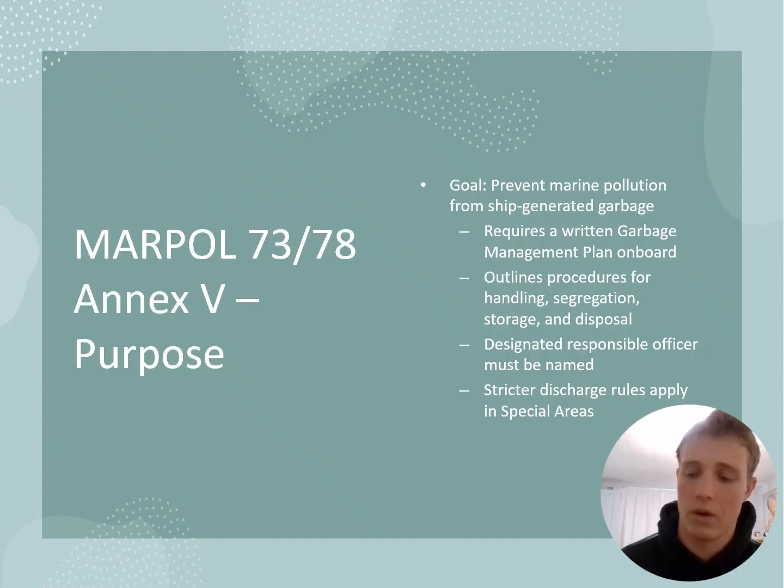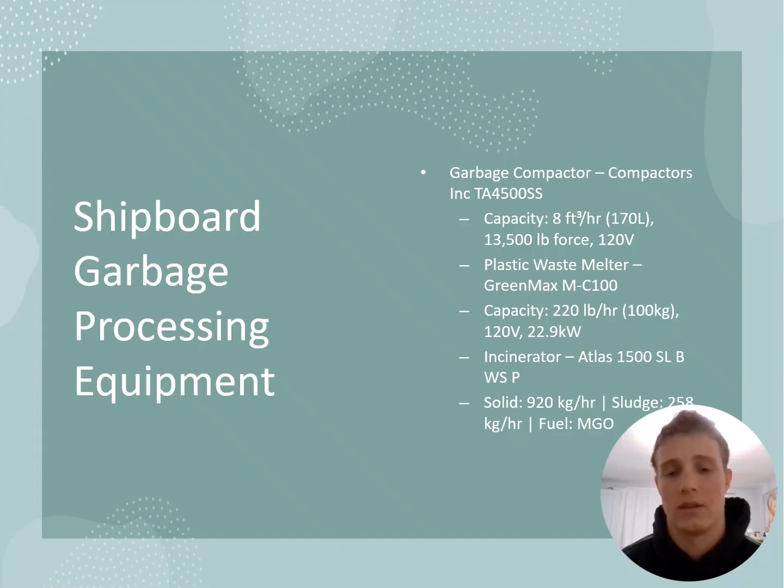So some of the processing equipment includes the compactor made by Compactors Inc. The capacity is 8 cubic feet per hour with a 13,500 pound force. Then we have a plastic waste melter for all the plastic garbage, which has a capacity of 220 pounds per hour. And then lastly, the incinerator, which is an Atlas 1500, and that's going to have a solid capacity of 920 kilograms per hour, and then sludge capacity of 258 kilograms per hour.

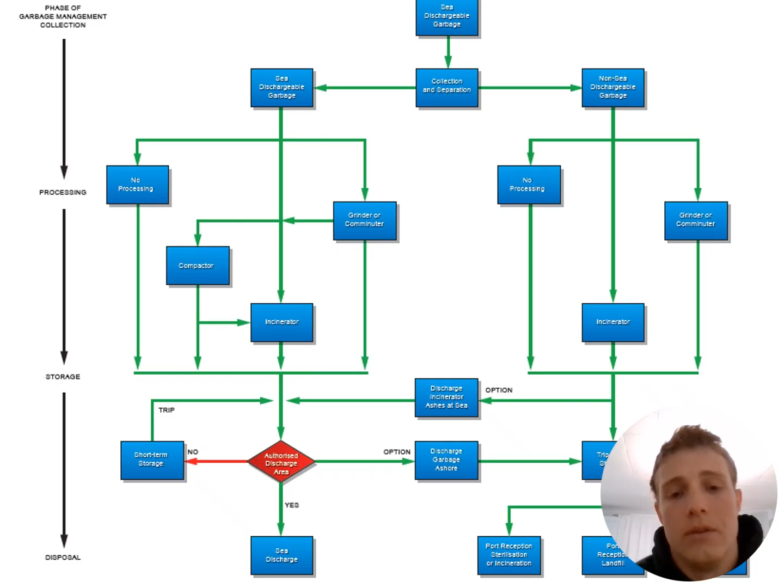And so this is the garbage management plan. So basically, it's going to go to sorting, and it's either going to go to dischargeable garbage or non-dischargeable garbage. And so the dischargeable garbage can either go to not be processed or to the compactor, incinerator, or grinder, and this just depends on what kind of food that you're processing or what garbage you're processing.

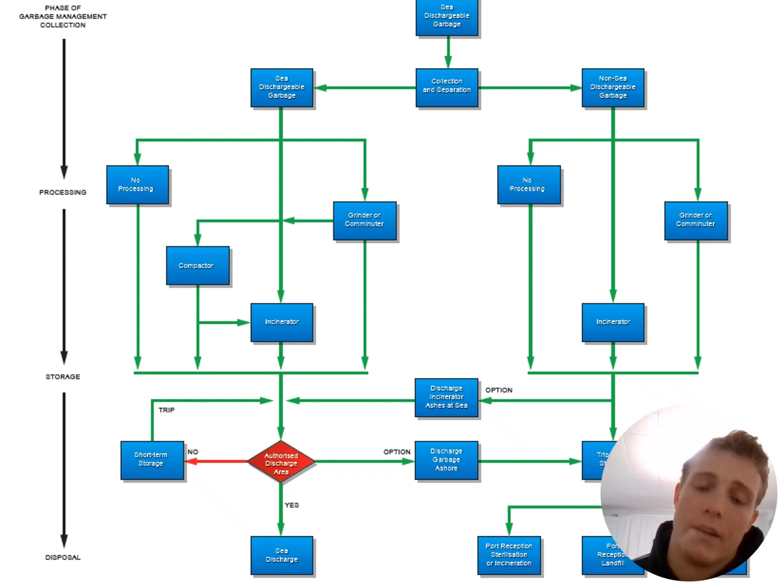So, and then after that, it can go to discharge area and either be put overboard or sent off to storage for port disposal. And then the non-dischargeable garbage can either go to no processing, the incinerator, or a grinder. And then after that, the incinerator ashes can either be dumped overboard or brought to storage for port disposal.

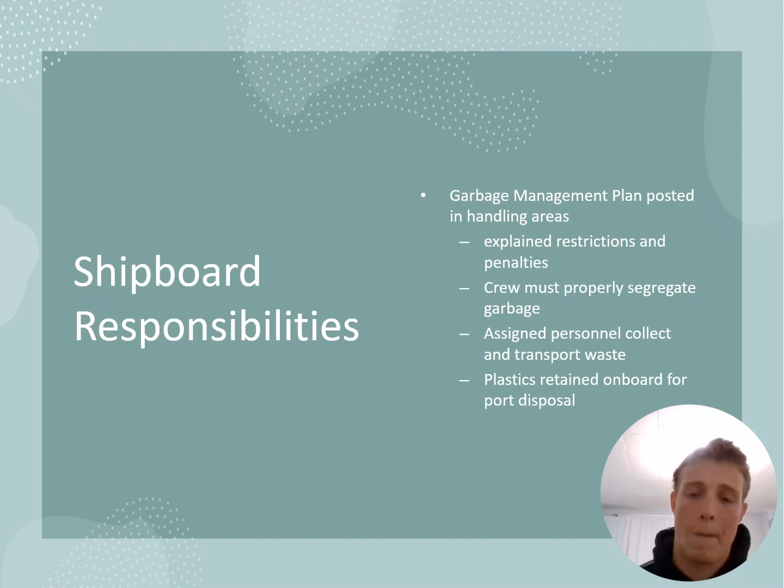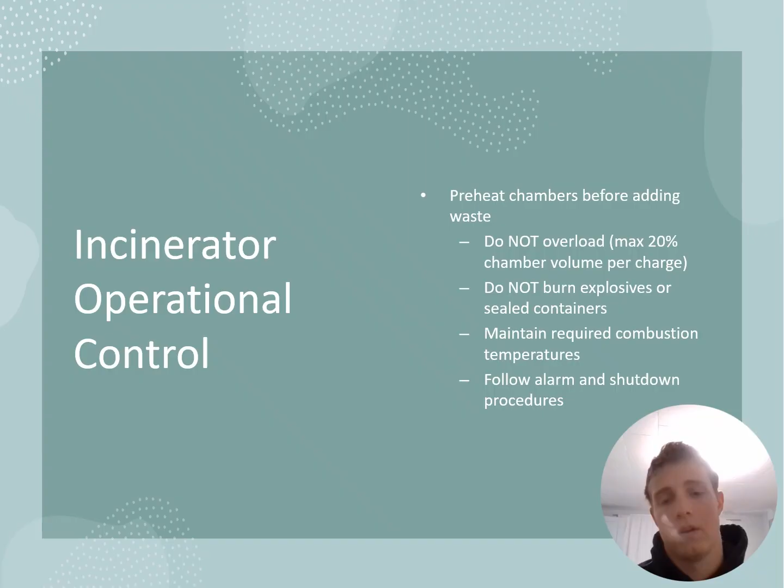So this is the incinerator control. It's kind of just an overview of the parameters of the incinerator. So you need to preheat the chambers before adding any waste. Don't overload it. So the max chamber volume is 20% that you can add at a time. Do not burn explosives or sealed containers. Must maintain required combustion temperatures so that all waste is burned. And then need to follow all shutdown procedures for the incinerator.

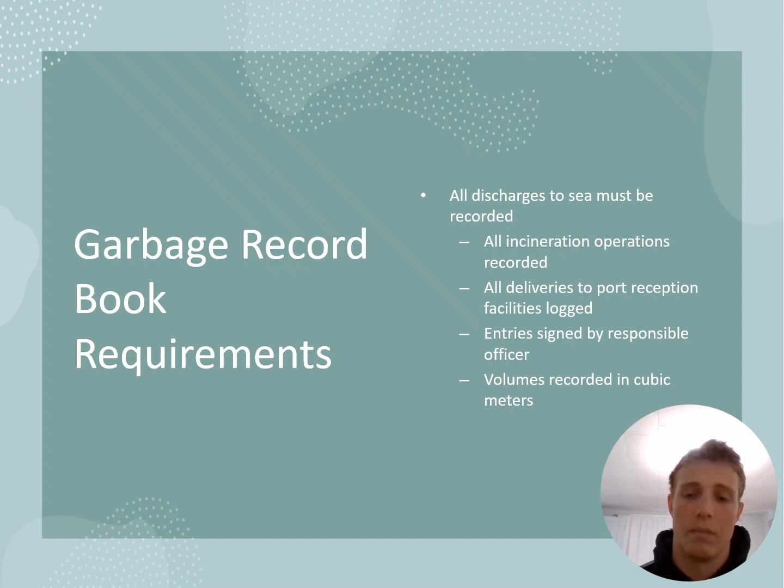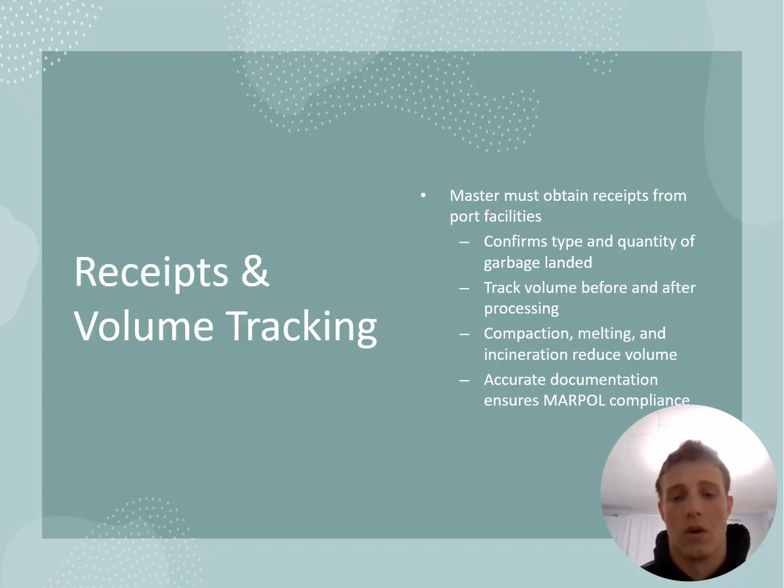So lastly, receipts and tracking, which is done by the master captain. This confirms the type and quantity of garbage landed, tracks volumes before and after processing, and this shows MARPOL that there's an accurate documentation of garbage.

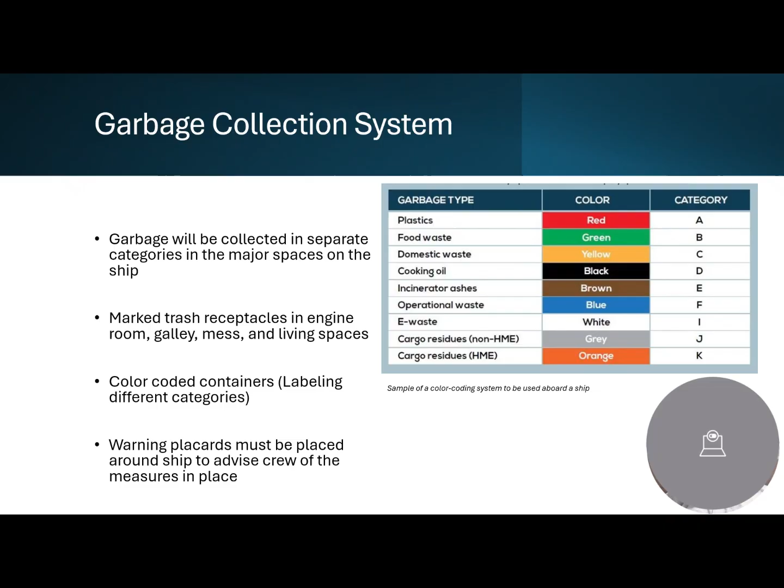It is a requirement under MARPOL 73/78 Annex V to have a garbage management plan on board the vessel. It is crucial that all crew on board follow this plan. The plan will outline procedures for handling, segregation, storage, and subsequent disposal of ship's garbage, as well as a plan being placed in all locations of major garbage handling. The plan will also name the person on board responsible for the management of the plan.

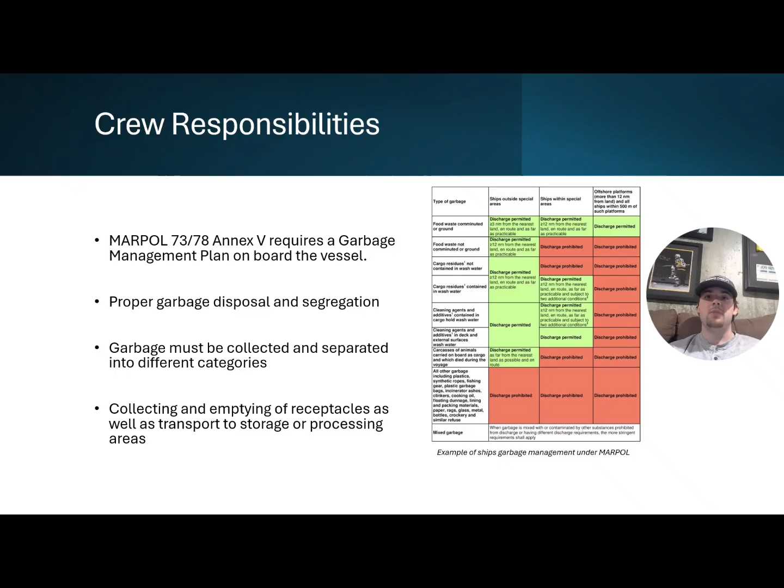The main garbage categories include, but are not limited to, plastics, food waste, oily and contaminated rags, and other garbage such as paper, glass, metal, dunnage, and incinerator ash. Each of these categories have different disposal requirements.

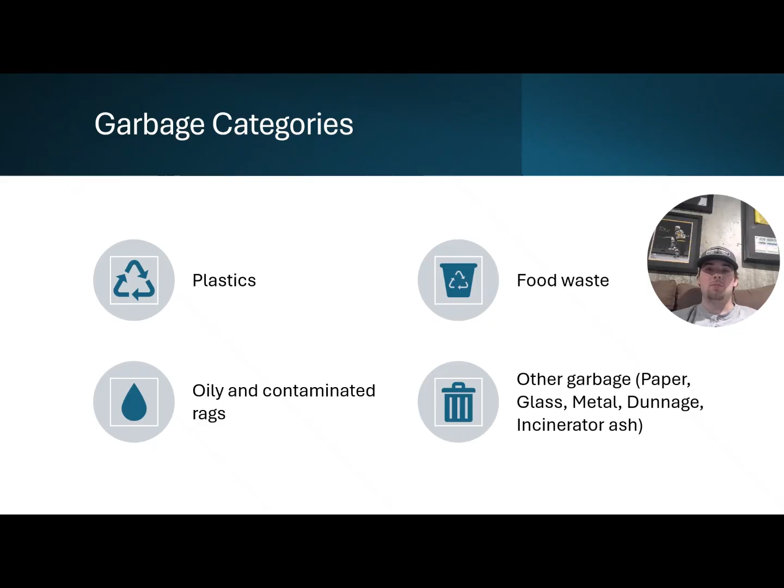Storage and disposal rules. Plastic garbage must be retained aboard the ship for discharge at port reception facilities. If incinerated, then the residue, ash, and plastic clinkers from plastic incinerated solid waste should be retained on board until a suitable shoreside facility is available. When plastic garbage is not separated from other garbage, the mixture must be treated as if it were all plastic.

Food will be disposed of overboard. Precautions must be taken to ensure plastics contaminated by food wastes, like plastic food wrappers, are not discharged at sea with other food wastes. Oily and contaminated rags or cotton waste must be kept on board and discharged to a port reception facility or incinerated. If stored on board, such materials should be kept in a steel container fitted with a secure airtight lid and stowed away from any hazardous areas.

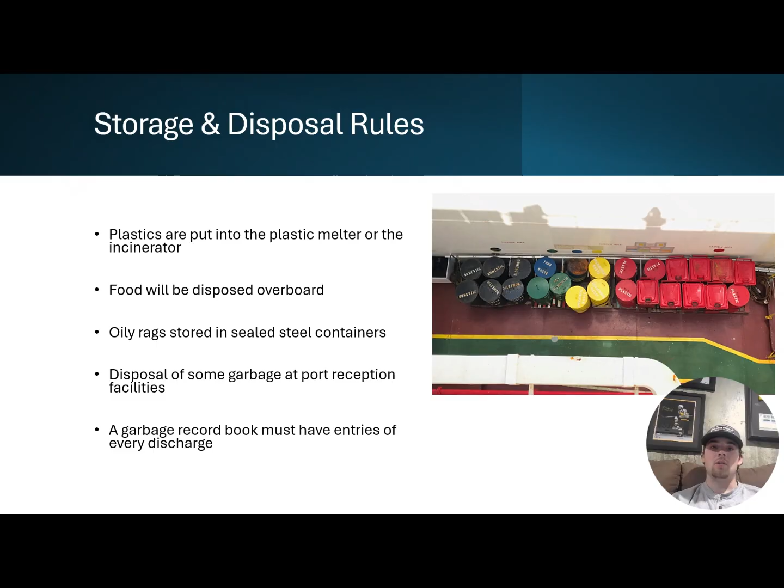Disposal of some other garbage not listed will be done at port reception facilities. It is also a requirement to maintain a record of each garbage discharge operation. This includes all discharges to sea, to reception facilities, in port, or to other vessels. All operations are to be recorded in the garbage record book.

I'm Dylan Farmer. Next, we're going to be talking about the garbage compactor, the plastic waste melter, and the benefits of using the equipment and the procedures. The model of the garbage compactor used on board the T-Summit is a TA4500SS. It processes about 8 cubic feet of garbage per hour and produces about 13,500 pounds of compacted force. The motor is 120 volts. The machine works by using a hydraulic ram to compress the waste, turning it into a dense block.

By compacting the garbage, we're able to save a significant amount of space on board the vessel. It also makes the waste much easier to manage and organize. In addition, it helps keep the garbage areas cleaner and more controlled. Since you'll not have hundreds of loose garbage bags to deal with when entering port, it'll be a lot easier. It's important to note that all oil rags, contaminated rags, must never be put in the garbage compactor. They must be put in a unique, separate handling area.

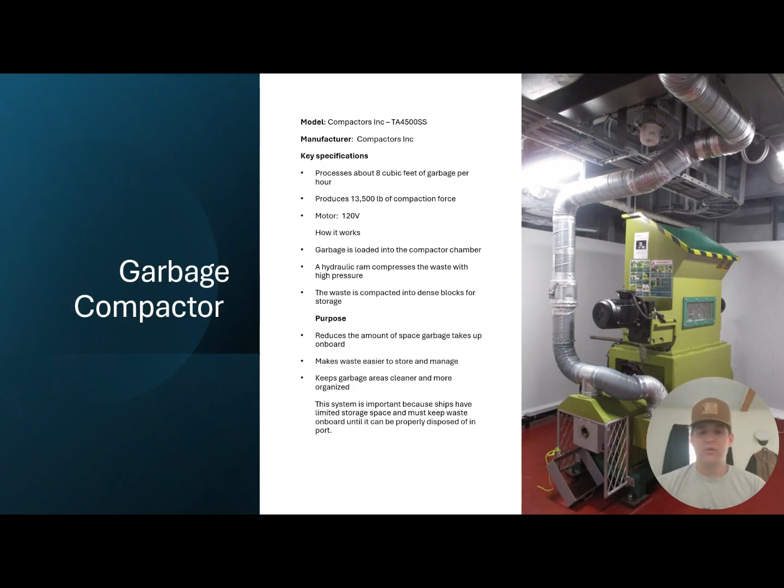Next is the plastic waste melter used on board. It's a GreenMax M-C100, which has a processing capacity of 220 pounds of material per hour. Also, the motor runs at 120 volts and at 22.9 kilowatts. It works by feeding plastic into the machine, where the plastic is then heated and melted. After melting, the plastic is compressed and formed into a tightly packed block, similar to how the garbage is compacted in the trash compactor. The purpose of the system is to reduce the volume of plastic waste, making it easier to store on board and dispose of when the ship reaches port.

It is also important to note that oil rags, contaminated rags, cannot be placed in the plastic melter or trash compactor. They still must be in their own safety containers. In addition, plastic and non-plastic waste must be separated before processing. If the waste is not properly separated, the entire load of trash must be treated as plastic waste, which will increase the amount of material that must be processed by the melter.

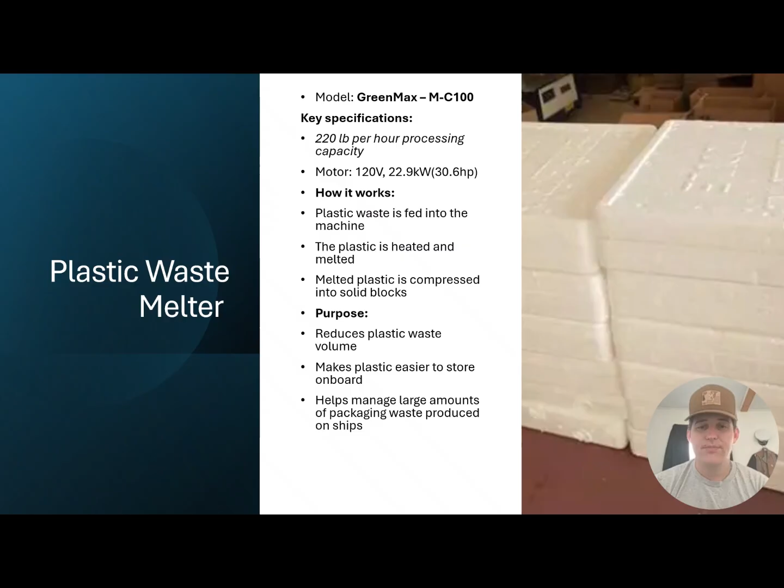And then we have processing benefits. One of the biggest advantages to using waste processing equipment like the garbage compactor and plastic waste melter is the reduction in storage space needed on board. Ships produce a lot of waste every day and space is very limited, so reducing the size of the waste is extremely important. By compacting garbage and melting plastic into dense blocks, the ship can store much more waste in a smaller area until it reaches port for disposal.

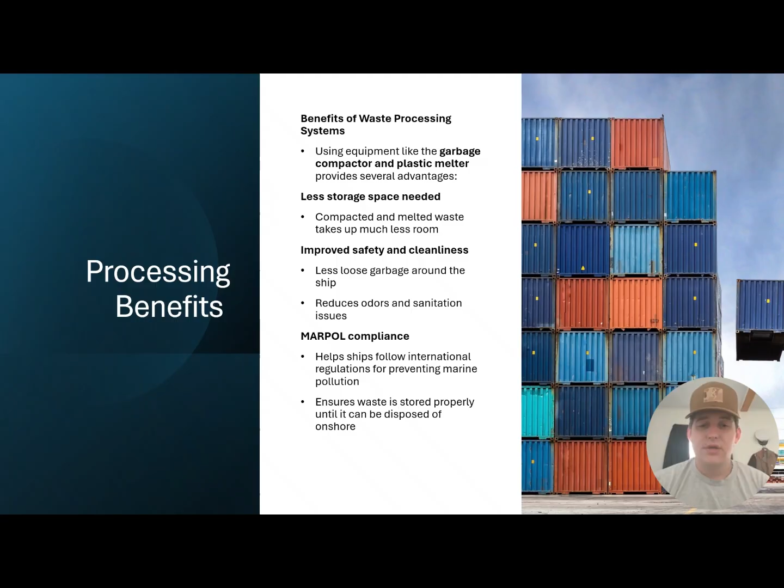These systems also improve safety and cleanliness on board. Loose trash can create sanitation issues, unpleasant odors, and even safety hazards in the work areas. Processing the waste keeps garbage organized and contained. And finally, these systems help ships comply with international environmental regulations like MARPOL, which are designed to prevent pollution and protect the ocean.

Hello, my name is Connor Phelan, and I will be focusing on the incinerator system design and components. On the training ship State of Maine, we will utilize the Atlas Model 1500 SLBWSP. This is a robust unit that is designed to handle both solid combustible materials and waste oil or sludge.

This system is a powerhouse with a calorie capacity of 1,290,000 kilocalories per hour, which is roughly 1,500 kilowatts. To give you an idea of its processing power, it can handle up to 920 kilograms per hour of solid waste and up to 258 kilograms per hour of liquid waste.

It operates primarily on marine gas oil, which has a minimum viscosity of 2 cSt at 40 degrees Celsius, and is supplied from either the number 2 or the number 3 MGO service tanks through the incinerator fuel oil pumps.

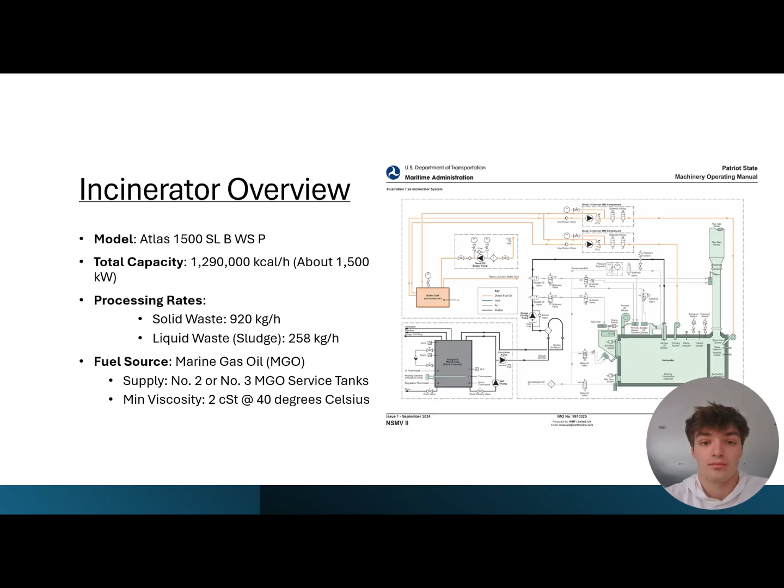Moving on to the heart of the system, the combustion design, the Atlas incinerator uses a dual chamber approach that ensures complete thermal destruction and environmental compliance. The primary combustion chamber is where the solid waste is loaded and the sludge is initially burned. Safety is paramount here, and the chamber is equipped with an ash door switch and a sluice switch to ensure that the unit cannot be opened or operated unsafely during the burn.

The secondary afterburner chamber is where the flue gas from the primary chamber passes into the secondary zone. Here they undergo further combustion to eliminate unburned particles and minimize emissions before exiting through the flue gas outlet and funnel.

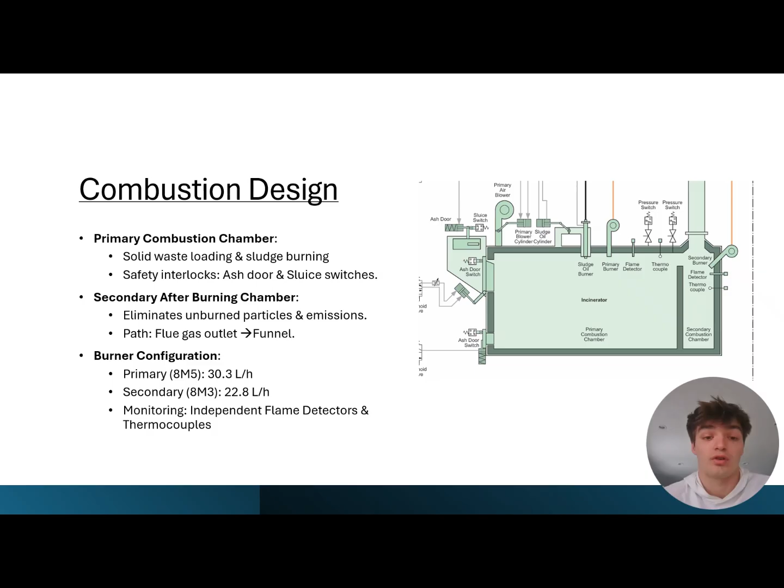The burner configuration: the system features 2 high-pressure MGO burners. The primary burner has a capacity of 30.3 liters per hour, while the secondary burner handles 22.8 liters per hour. Each is monitored by its own flame detector and thermocouple to ensure stable combustion.

Several critical components work together to keep the system running efficiently: the sludge dosing pump, the primary blower, the circulating and mill pumps, and the sludge tank heaters. The sludge dosing pump is a progressive cavity pump which is equipped with a VFD, and it precisely regulates the sludge flow to the primary burner, ranging from 45 to 210 liters per hour.

The primary blower is a high-pressure centrifugal fan which provides massive amounts of air required for combustion and delivers 14,800 cubic meters per hour. The circulating and mill pumps are within the sludge oil mixing tank. The mill pump grinds and homogenizes the waste to prevent burner clogs, while the circulation pump keeps the fluid moving to maintain a consistent temperature.

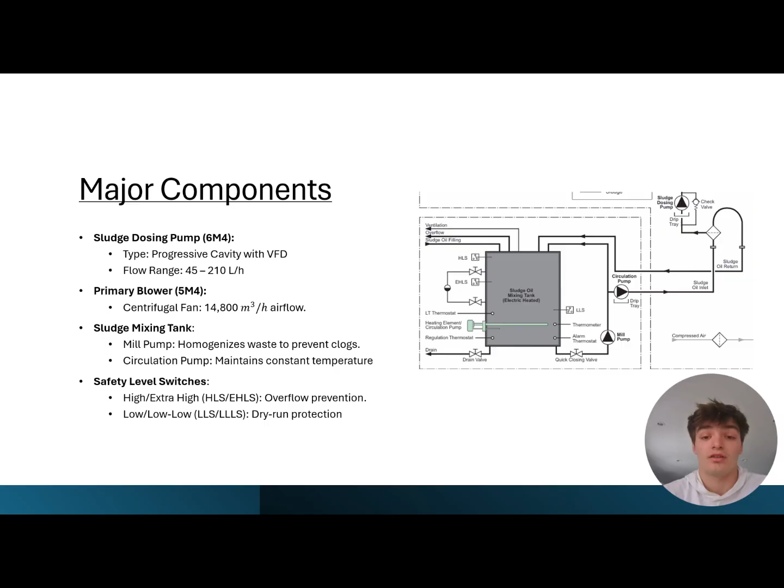The sludge tank heater is used in the mixing tank and is electrically heated and controlled by a regulating thermostat. It includes multiple safety levels, including the high, the low, and even extra high and low switches to prevent overflow or pump dry running.

Finally, let's look at how this is all managed. The entire operation is governed by a PLC-based control system. The PLC automates the complex startup sequence and monitors all vital signs. This includes constant tracking of temperature and pressure via thermocouples and pressure switches, such as the primary air blower pressure switch. If parameters fall outside of safe limits, for instance, if a low level is detected in the buffer tank or a flame failure occurs, the system triggers immediate alarms.

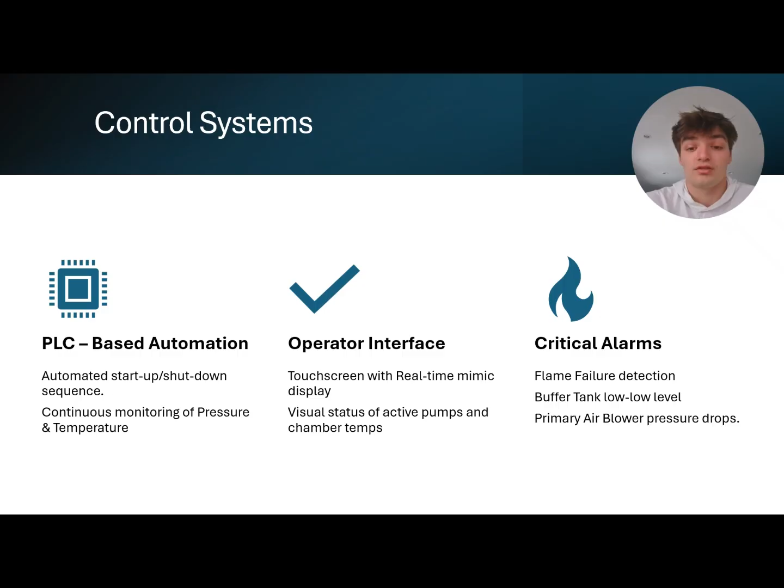The incinerator's control panel consists of a main start-stop switch, an abnormal alarm indication, and a touchscreen. The operator interacts with the system through a touchscreen display, which provides a real-time mimic visual overview of the system status, active pumps, and current temperatures in both combustion chambers. This ensures that we can manage the ship's waste safely and efficiently at the touch of a button.

So the first mode we'll be talking about is the solid waste mode. Before operating the incinerator in solid waste mode, it is important to understand that you should never put solid waste with too high of a heating value into the combustion chamber before the primary burner is operating and a flame is visible through the sight glass. You should also never put more solid waste than the recommended amount for the specific incinerator size. You also must select solid mode on the control panel display. So after doing what you need to do before you start it up, you can now start up the incinerator.

To start it up, you must turn the start-stop switch to the start position, which then activates the primary blower, which will run until the switch is turned to the stop position. At the same time, the impeller for the primary and secondary both start, and the MGO circulation commences circulating through the burners and back to the MGO tank. A 30-second purge cycle begins for the primary and secondary burners. An hour counter then begins to track how long the machine has been running.

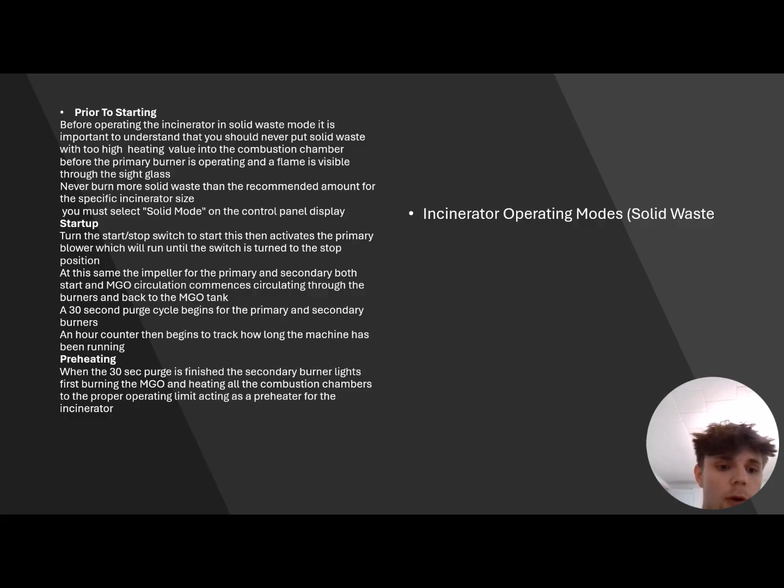So now for the preheating. When the 30-second purge is finished, the secondary burner lights, first burning the MGO and heating all the combustion chambers to the proper operating limit, acting as a preheater for the incinerator.

So now we get to the start of the combustion. When the secondary burner reaches 100 degrees Celsius, the primary burner then ignites, also burning MGO. The secondary burner will continue to burn, and then when the temperature reaches 650 degrees Celsius, solid waste bags will be fed into the secondary chamber. At this temperature, waste can burn effectively, cleanly, in a controlled manner.

When the incinerator is running, there are automatic burner controls for both burners. These automatic controls can start and stop the burner based on the current temperature in the combustion chamber. If there is a temperature drop, the burner ignites, and if the temperature gets too high, the burner stops until the temperature is regulated. For every restart of the burner, there's also a 30-second delay for the purging of the burner. The incinerator uses flame detectors to monitor the flame and sends signals to the flame control circuit.

If the flame stops for any reason after 1 second, an alarm will activate and all the oil valves will close except for the quick closing valve, which will stop the fuel supply to the incinerator to prevent flooding of the furnace.

So for the operation of the secondary burner, when the secondary chamber reaches 930 degrees Celsius, the secondary burner shuts down and the solenoid valve in the fuel line closes, cutting the fuel, and this is done to prevent overheating of the combustion chamber. When the temperature drops to 870 degrees Celsius in the combustion chamber, the system restarts and the solenoid valve opens back up, and then after the 30-second purge delay, the burner will ignite again.

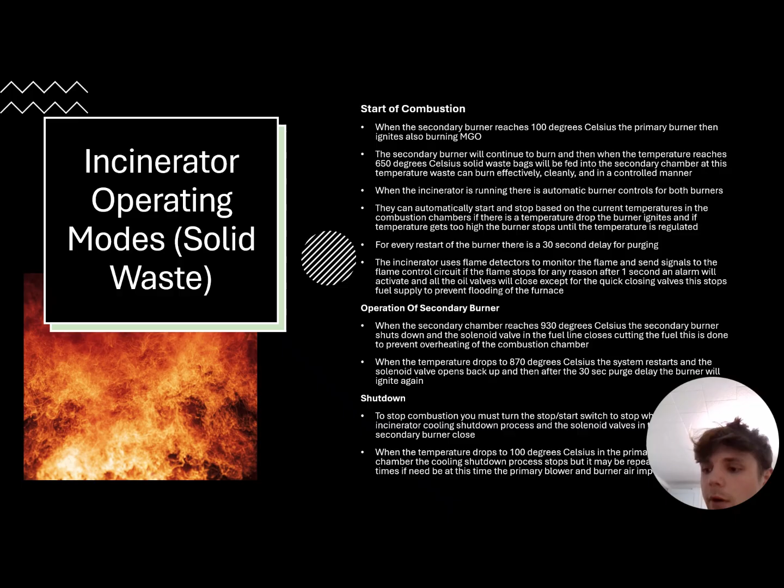To stop combustion, you must turn the stop-start switch to stop position, which will then activate the incinerator cooling shutdown process, and the solenoid valves will close. When the temperature drops to 100 degrees Celsius in the primary combustion chamber, the cooling shutdown process stops, but it may be repeated a few more times if need be. At this time, the primary blower and burner air impellers stop as well.

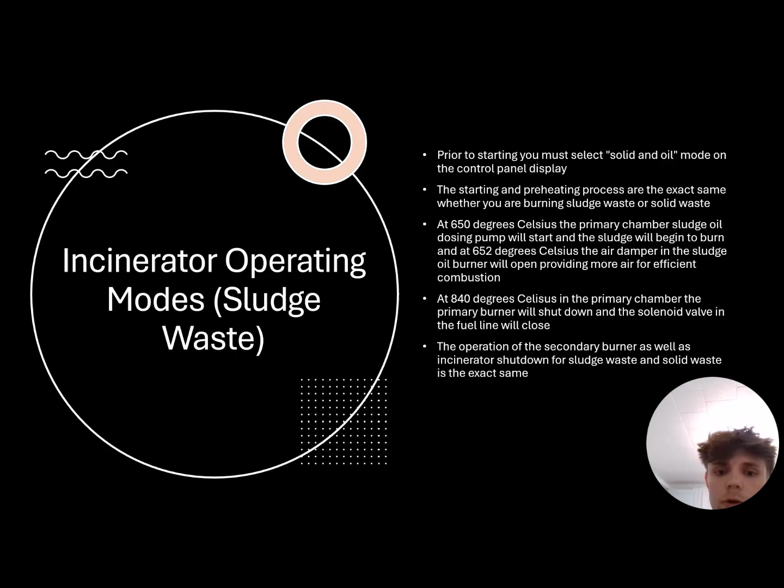At 840 degrees Celsius, the primary chamber burner will shut down and the solenoid valve in the fuel line will close. The operation of the secondary burner as well as the incinerator shutdown for sludge waste and solid waste are the exact same.

So the next one we'll be talking about is the simultaneous burning of solid and sludge. The combustion temperature must be set to 850 degrees Celsius on the control panel display and also must be set to solid and sludge mode. To have low emissions when simultaneously burning sludge and solids, you must first start by burning only sludge for 1 hour to preheat the combustion chamber.

Following this hour, the control panel should then be set to solid, and then the solids should be burned alone for 1 hour. After 2 hours of doing this, you can switch the control panel back to solid and sludge mode, and the solid and sludge waste can be mixed together simultaneously to burn.